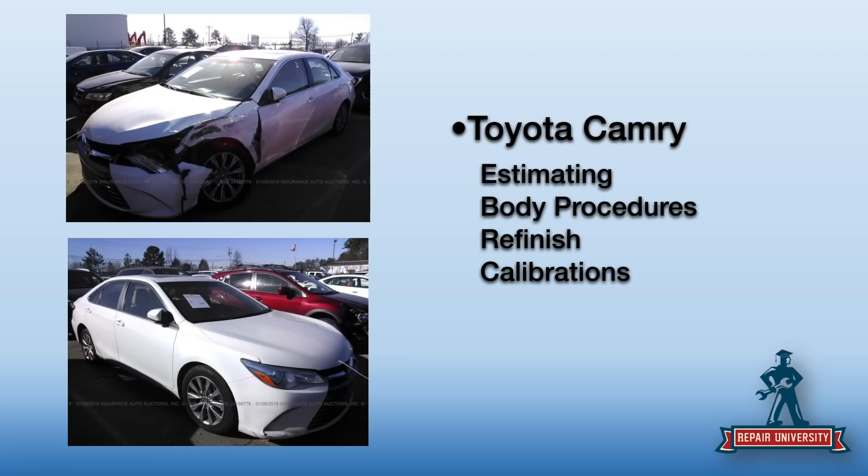So we're going to talk about the estimating. What we call the body procedures will be the body tech. Refinishing, yes, painters, you too need to be thinking about OEM information that's available to you. And then we'll talk about the calibrations department. I don't want to say scanning. No. Pre-scan, post-scan, I think that's way overused. And if you think just having a scan tool gets it done, it doesn't. It doesn't, and you're leaving a lot on the table. So we'll talk about the tools and equipment that are required beyond scanning. You have to have a scanner or a way to scan, but that's such a small piece of what we're actually going to talk about. A tiny piece. Very tiny.

And as we get more into this, it's honestly the scariest thing in the shop for me. I spend hours and I go, I don't have that tool. I don't have that tool either. Yep. So we've talked a lot lately about, is the dealer just my best option? And I think we'll spend a lot of time on that this year.

I think somebody said that before. I don't know. Some crazy guy from Brooklyn. Oh, some guy. Okay. Some guy. All right. Same lunatic talking about measuring cars.

So Mark, what do I need to know about this 2017 Toyota Camry? Everything. And when do I need to know it? Now. I need to know it right now.

So it's really about what's available out there to know everything now, and that happens in the beginning of the process, not when the car comes into the body department, not when we're trying to figure out how to get the frame rail section. We always hear that online, people asking, can somebody send me the sectioning procedure for the frame rail, with a picture of the rail already out of the car and the new rail sitting on the floor. It's too late, you removed it.

It's kind of like taking the heart out and going, anybody know heart surgery? I don't know anybody that has heart surgery. So the process for us begins before the car hits the blueprinting stall. As an estimator or blueprinter, before you walk out into the blueprinting stall, which means you should have a technician out there doing teardown or whatever, there's a lot of research that goes into preparing you to walk out to that stall.

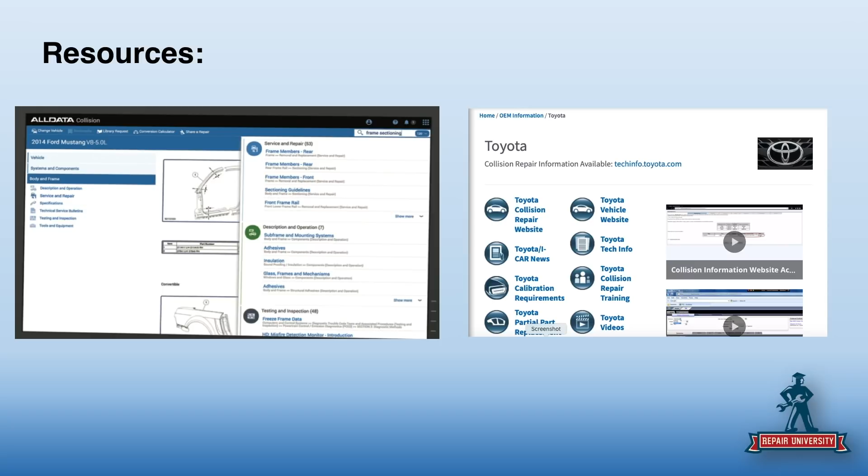Now I've got three potential sources of information. Those resources are a third-party information site. For us, we're looking at ALLDATA Collision Advantage. We also have I-CAR, which is available out there as a third-party site. You can use estimating systems too. Some of those have some information available.

Really what we're dealing with here is you've got to know what you're looking for, you've got to know to go look for it. Part of this is we've got to really look at the car. What options does it have? Where are we going to go? This is before you can ever use an ALLDATA or even the TIS.

So let's talk about TIS. For Toyota, that is TIS, and that is the website that you're going to go to.

Wait, what? Isn't Facebook one of the places to go, one of the three sites for information? Oh, I thought it was one of those free sites you can go to and ask information and find out. I wonder if there's a Surgeon Doctors Operation United page out there where I'm in the operating room, I have an appendix out and the liver out. Does the liver have to go back in? Does someone have that? Which procedure do I cut first? What was that movie with the liver and a fine Chianti or whatever? I don't know, thank God doctors don't operate that way. Oh, you're in court right now, it's like professional lawyers united. Well, here's the thing, you don't know because you can't get in. Right, I can't get in. Yeah, there might be, there might be. It's like my client's up on this right now.

All right, well we covered Toyota and we covered TIS earlier in the year. There's a couple different ways that you can access that website. You can do it on a 48-hour pass, you can do it monthly, you can do it yearly. Depends how many cars you get in your shop, you might want to buy yearly if you get a lot of them in there.

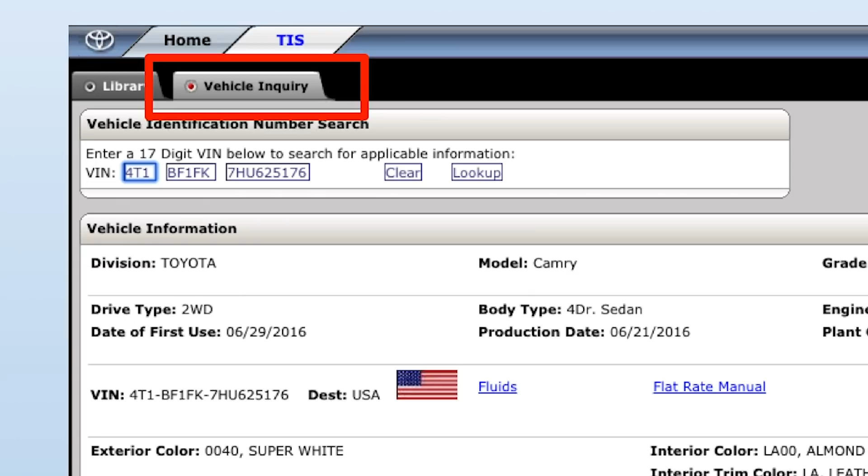So you see library and you see vehicle inquiry. The first thing we want to do is jump over to that vehicle inquiry tab. That's where we're going to enter our VIN. We hit lookup, and it's going to decode that VIN and tell us all kinds of useful information.

All the different options that the vehicle has, because if we don't know what options it has, we can't fix the car. One thing that's coming to light, and we'll talk a bit more about it when we get down into options, is that this isn't your golden ticket. As things become standardized on vehicles, whether that's ADAS or safety systems or whatever, doesn't necessarily mean they're going to be listed here.

Remember back in the old days, every time a car would come out with anti-lock brakes, they'd put an emblem on the back? Well, now since every car has it, they don't have that emblem anymore. It's the same kind of thing here. But trim packages—I order parts by trim packages and some other things.

So if we jump back and go to the library tab, you're going to spend 99% of your time on TIS inside this library tab. Then if you go to where you do your search—we've already defaulted to looking for a Toyota Camry 2017—you'll see across another set of filed tabs.

Just real quick, you have the summary tab, pretty self-explanatory. Technical service bulletins, recalls, TSBs from Mexico and Canada—you need to make sure you're paying attention to the country you're in at some point. You're going to see all kinds of things in there.

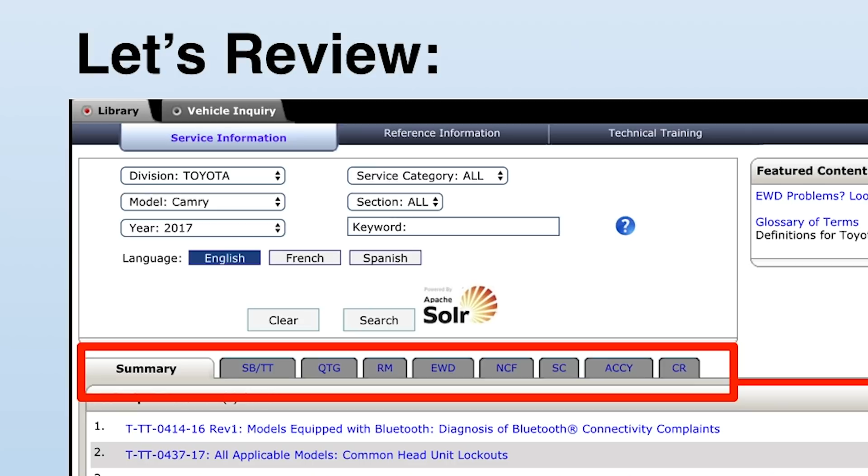As you go across, you see a few more tabs: SB/TT, that's service bulletins and tech tips. You have the QTG, which is quick training guides. RM is repair manual. Electrical wiring diagrams are EWD, new car features are NCF, service campaigns SC, accessory information is ACCY, and CR is the collision repair manual.

Now, most people are going to go right to the collision repair manual. And you're going to miss a whole lot if you do. Right, you've got to be in the repair manual too.

Here's the breakdown: if you want to know how to take something off, put something on, or disassemble it, take it apart, you're in the RM. If you want to know how to weld something, join something, bond something, paint something, seal something—more along the lines of the nuances of collision repair—you're in the collision repair manual.

So you can use search words, keywords, go to the summary tab, search and bounce between the two if you want to. But we're going to live and die inside the RM and the CR. There are a few occasions where you'll jump off to a few of the other tabs.

Keep in mind, when we did the Toyota show, we showed you a lot of online training that Toyota has available, free to anyone in the industry. You don't have to pay for TIS to get a lot of access to that. That is not what those quick training guides are.

On the top it says technical training. That tells you how to destroy their welds and how to practice your welds, and there's a ton of great stuff in there too. But we're not going there in this show.

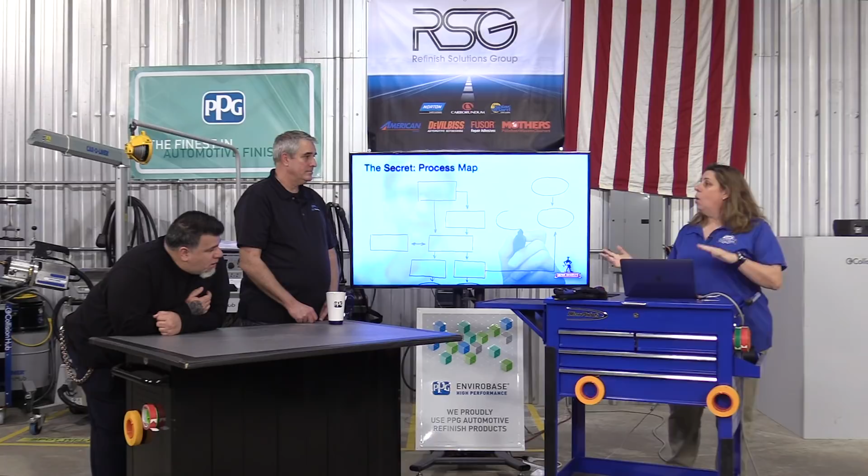I feel like what was that Oprah Winfrey book, The Secret, that she promoted or whatever? Here's the secret: with every repair, I build a process map in my mind, because I've gotten there. I wasn't always there - I used to have to kind of scratch it out. There used to be whiteboards all over the place. I build a process map for that repair.

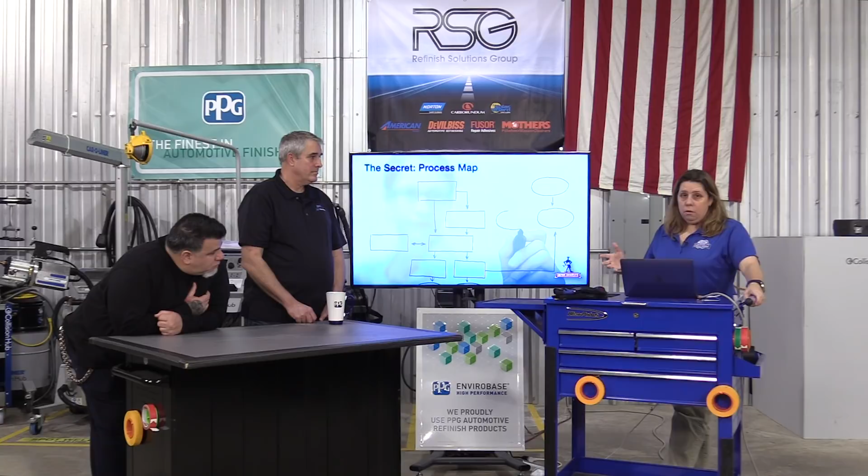Everything that I know I'm going to have to do - what's coming off the car, what's being replaced, what's going to go back on the car, what's not. And as I'm building that process map, that is telling me what I need to go research for. So if you think that OE repair information magically appears based on 'I'm going to replace a fender,' there's a whole lot of stuff that you're missing.

Well, think about it - if you're going to pull a dent on a car and you disconnect the battery, the estimating system is not going to serve you anything on that. And there's so much more that we're going to have to do, that you're going to go into. So as you build this process map in your mind of what's going to happen, that's now telling me what I need to go research for, and the answers that I need to find.

So some OEs have general position statements. Now those are more than just 'don't use aftermarket parts' or 'pre-scan or post-scan.' Some OEs have a lot of really detailed information in them - Toyota is one of them. Toyota has a lot of CRIBs, collision repair information bulletins. They are available out there. I will say Toyota's been moving them around on me lately.

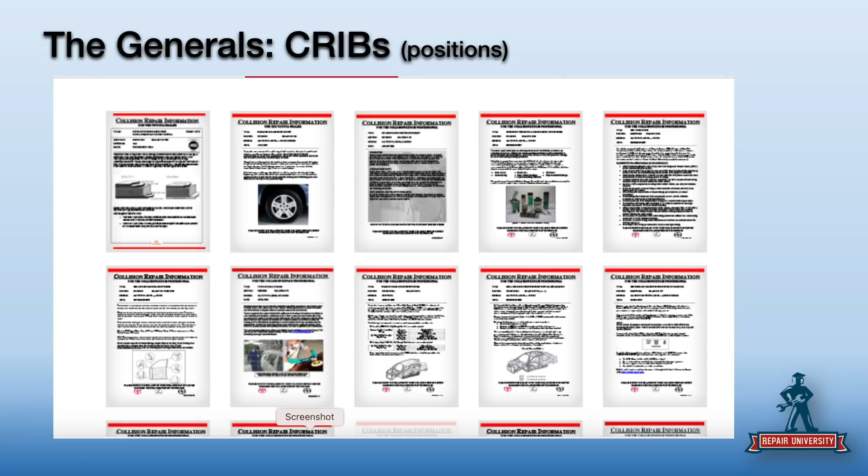So I feel like I'm playing the shell game at Vegas for $5 a try or a guess or whatever, but they have a bunch of CRIBs. Most shops who work on a decent amount of Toyotas have these kind of printed out and have them available. CRIBs for Toyota can cover everything from how to repair a dent, the primer that you have to have before you do filler, the welding precautions, paint, corrosion, glass protection, one-time use parts - all kinds of stuff.

They're more the company that understands what these CRIBs are actually for, or the position statements. They're really not standalone - they're in addition to the manual, and it covers a bunch of vehicles, not just one particular procedure or position to stand on. It's more of an addition, an amendment, or an addendum to the repair manual that's already pre-existing, to explain something - like, they changed the materials in the center section, so there's stuff that can't be repaired, but it covers all their vehicles from this year forward.

That's really what a position statement's for, or what a CRIB should be, as an addition. I don't have to change the whole manual, but you know what, let's mention this - it's a repair information bulletin. Yeah, that's all it really is, you know.

But now as I've started to build the process map in my mind, I've seen that car, either in the pictures that maybe my porter turned into me, and I know it's one of my blueprint requirements today - it's on my assignment list. As I'm building that process map in my mind of what I know is going to have to take place to fix this car, I now go for Toyota and I look at these CRIBs. I'm not by any means standing - they're not things I'm going to shove across the desk at an adjuster or whatever. But these CRIBs, the ones that are relevant, are starting to guide my conversations. They give you the cheat sheet.

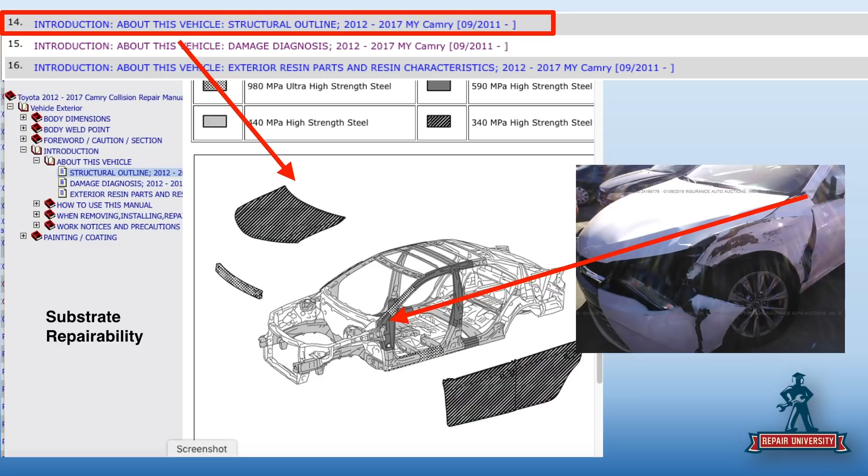And in the rest of the diagram as I go through substrates, that's really my only substrate concern right now - the rest is mild steel. I've got a little 440 on the rails, but 440 is repairable. We'll find out when we actually see what it's got. So we're good to go on that one.

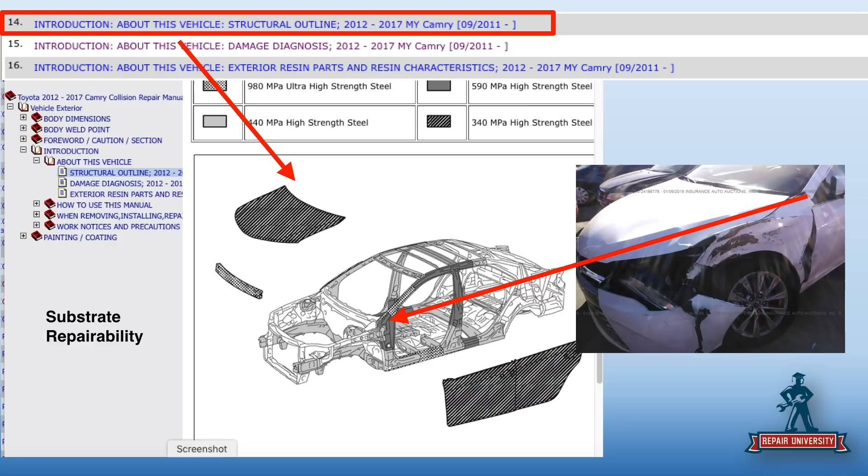But now I know I've got to pay a little more special attention to something. So let's talk direction of travel. Yep, this car took a glancing blow. Obviously, suspension's a mess on this one. Well, the applied impact forces are at or at a slight angle to the center line of the vehicle.

So you would anticipate this type of collision event might have laterally moved the car towards the right to a certain extent, which would make you think, okay, let me check underneath the hood visually, see what type of damage might have occurred that left some areas with stressing to the seams, seam sealer cracked, on the opposite side of the vehicle. We can see the rim was induced inward at the top because of the way the front of the nose was pushed over a little bit and kind of smushed inward.

So you're going to probably anticipate the strut towers moved. Strut tower, strut - you're going to anticipate the strut. You're going to anticipate, obviously, the wheel is damaged already.

But then, like we said, we're going to measure that A-pillar. So we have some things we're going to have to look at and measure diagnostically, because we might take the fender off, the hood off, maybe the wheel, the bumper cover, whatever's left of it, and the headlight, do some measurements, and find out the car is really a total loss because of the structural damage, the prices of the parts, and the amount of work that has to be done to the vehicle.

Or we might find out, shockingly enough, maybe that wheel's all completely collapsed because the strut gave way, and actually the strut tower's in the right spot. But unless you measure it, you don't know.

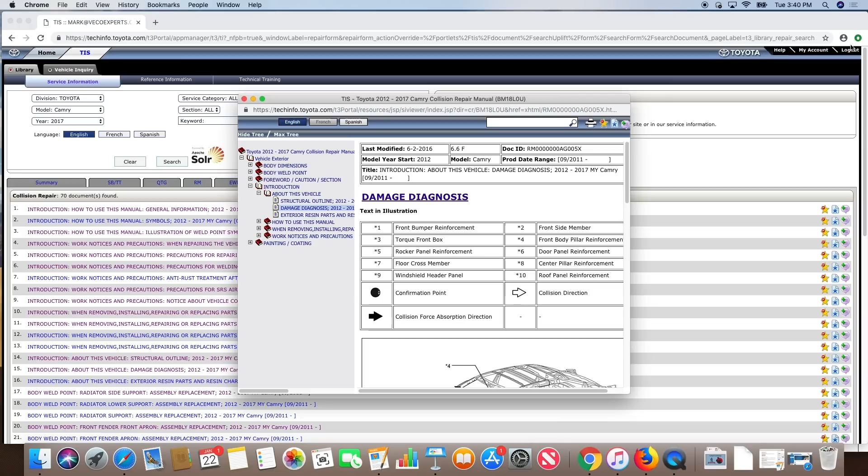If you look at 14 above it, that was where we were when we were looking at substrates and kind of what this vehicle is made of. But if I get into that page, Toyota has all kinds of diagrams for me that explain how this car is going to absorb energy and how it transfers, where's it going to go, and things I need to be aware of.

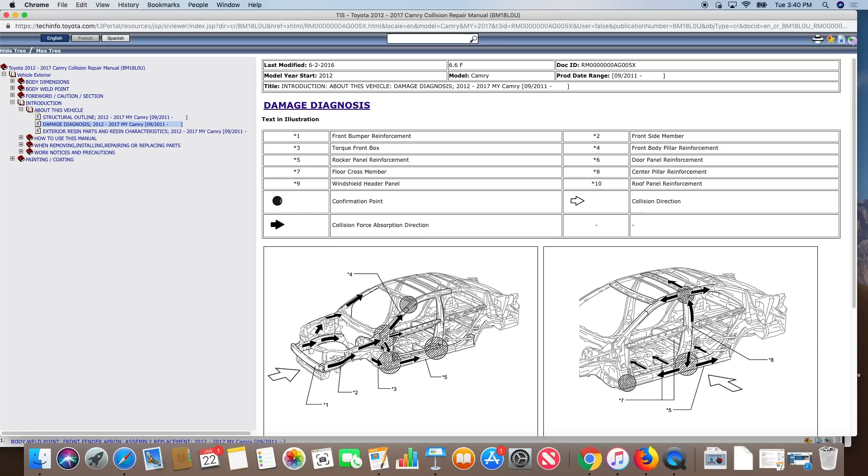So to keep in mind as an estimator, when you're looking at collision force absorption, basically if the car's hit this way, this is how energy transfers. If the car's hit this way, look at that, it's going straight across. I love this. So I take a side hit and it's going this way. Right? So up here it goes that way.

Well, that's the importance of the rocker, the inner rocker and the floor rocker cross panel members. It's just mild steel rocker panel, well the outer panel is. The inner rocker is different. And the B pillar is meant to transfer the energy up and over the roof to the opposite side.

But here's the problem you have with this particular vehicle. The applied impact forces that we have on the vehicle are from the front going rearward at or near a slight angle to the center line of the vehicle. And they don't give us a depiction of that because why? Well, it's not normal. Vehicles are built to absorb a certain amount of collision energy and transfer it someplace else, almost like tag, you're it.

And the idea of this is to keep the occupant safe. It's almost like the quarterback, and the front rails and the rear rails of the car are your offensive linemen that are trying to protect the quarterback from getting the Lawrence Taylor sack. And in this particular case, we have an opposite thing, it's like a Super Bowl episode.

Well, in this case, you can almost think of it this way: there was a handoff made, and now the nose of the car's running away, but the linebacker caught up and kind of tapped it, knocked it over. But here's what I need to know about these diagrams.

So even when I have an impact that is not exactly a replication of what just happened to this car, Toyota is telling me where the critical points of mass are. Those big circles are Toyota telling me that this is a major junction in the car, so it's what they call a confirmation point. These are the don't-touch zones, don't screw up zones, don't mess with these zones.

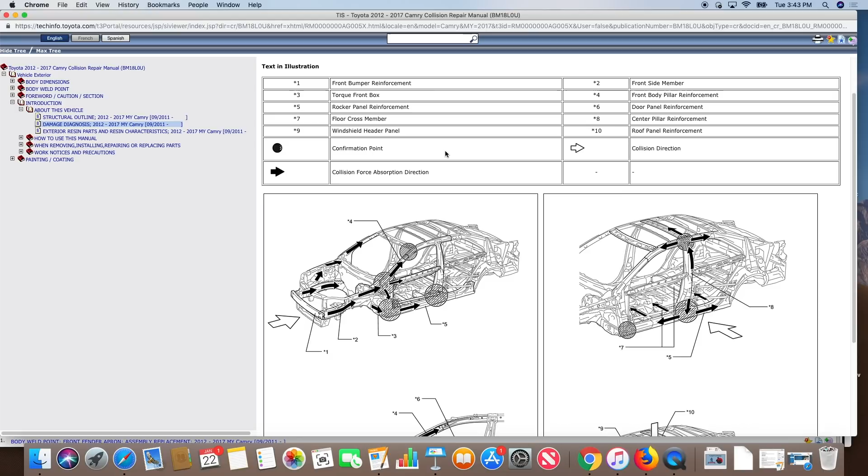For example, at number 4, on this picture over here, the top circle, which would be the A-pillar area, if you had applied impact forces going rearward from the front to the rear, at or near parallel to the vehicle center line, that area there, and you guys have probably seen this before, the upper rail on most of the Toyotas overlaps the A-pillar, and it's got the 3 or 4 fillet lap welds. You'd see that kind of crush a little bit.

In this case, the opposite. The direction of force is the opposite way. What you might see in this case is that overlap rail there might start stretched, pulling apart from that area. This is the difference, because it's not a depicted type of hit that we see here. When you get that fender off, you might even see this separated, versus beforehand, you might have not noticed it. It needs to be measured. Because the application of force is going rearward, it would be a crush. We don't have a crush in this. We have a pull. Almost like you're trying to rip the car apart from itself, because it got hit from the rear going forward and kind of slapped it over.

So you might see more visual stuff in this case versus a normal traditional collision event where the energy would be forced rearward. And that's the importance of getting some stuff apart and knowing, like Kristen said, that's a key point right there. That confirmation point is very important to look at, because you do have an overlapping of different materials there.

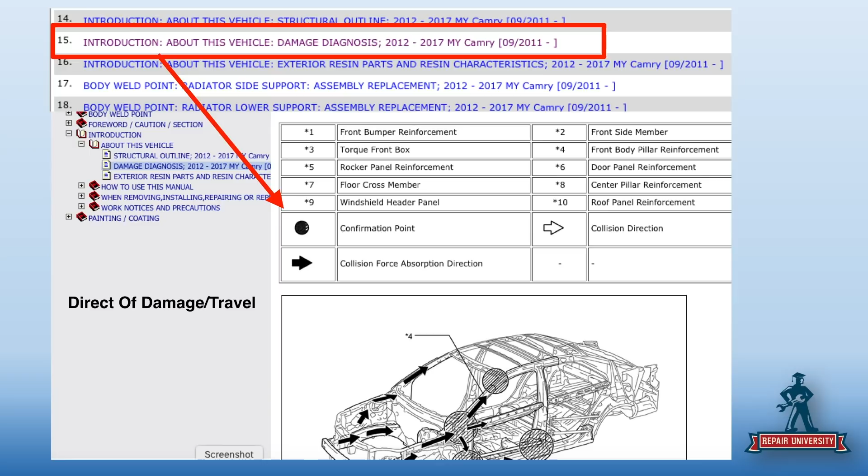Yeah, and if it gets hit in the front, that can possibly pull, as we're talking about, that forward, but it also could pull this down. It could pull that down. That's why we've got to measure it. It could also take the upper hinge, and you're kind of twisting it forward, because I took the rail and dragged it over. If I drag it over, everything's welded. What am I going to do with this upper portion? I'm going to drag that forward, the door.

And we don't have a good picture of it there, but there could be a good gap between the front and rear doors now. And you go to open it, it's kind of springing upward, because I took that and kind of tilted it forward. I may not notice that. Oh, it's the hinge is bent. Or the door's twisted on the frame.

So if we just look at that car, we go, the nose is just swung over. I think this is a car that everybody would have walked up to and put a little setup and measure time on, because that nose is swung over. But it's a much greater, bigger picture. And I know it's a bigger picture because I have the OEM information to explain it. Because we know what it's made out of, and we know the load path travel. Exactly. So we've got to now start to look at it from that perspective.

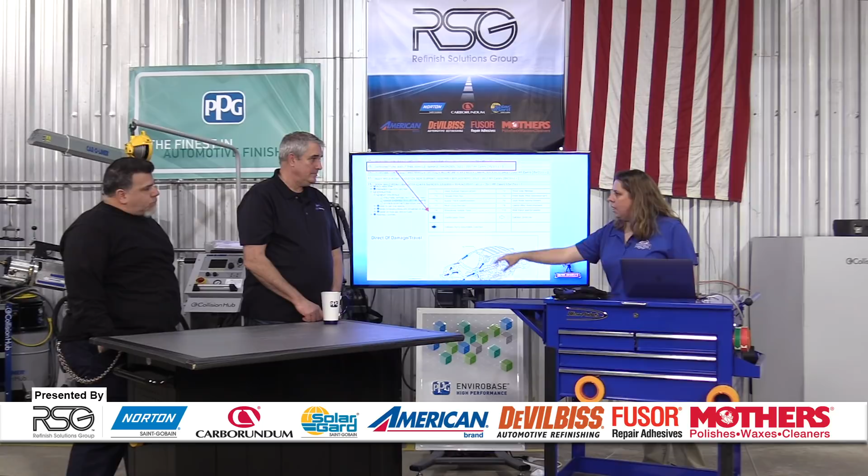Right. So if you're writing the estimate with these, this is 12 hours of setup and measure. Because I've got to measure the front, I've got to measure the upper and the lower, and I now have to measure the side, and I'm putting all of these setups and measurements on my estimate. And I may have a third party looking at me going, "Are you nuts?" Crazy, yeah. Okay, great. Here, let me take you to the information. Let me show you how the vehicle's built and designed. These are the no zones, and I know I potentially have something in the no zone, and if that no zone's wrong, that's live or die.

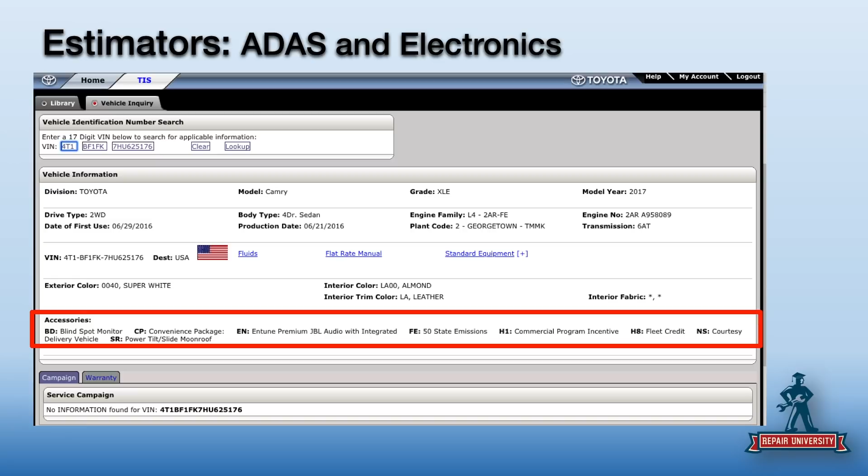So let's talk about ADAS and electronics. So we're going to go back to that screen where we were before, vehicle inquiry. Right. Now, ADAS is a lot more than just, when we say ADAS, or however you want to say it, it's become a buzzword, right? It's the latest, hottest thing in the industry.

CIC a couple of weeks ago, that was all that was on the agenda, and I was like, hey, we can't even weld. Can we talk about that? No, of course not.

But it's the hottest thing in the industry. And because people are talking a lot about scanning, we say ADAS, ADAS, and scanning, and we feel really good about ourselves, and we feel really intelligent and think we've advanced the industry a lot. There's a lot more electronics in the car. We almost get rid of ADAS and just say electronics. Yep. So there's a lot there.

So for instance, this is just a heads up. It's kind of a diagram. We've all seen the diagram that shows all the cameras and monitors and all this. These are some of the other things: rain sensors, trunk safety opening sensors, seat detection occupancy sensors, the ambient light sensors, door position sensors. Those are some of my favorite, right?

I like the gesture recognition, because is that a different one for Brooklyn? How does gesture recognition work? You would have to do something like this. I mean, when BMW sets gesture recognition in my car here in Arkansas, is it a different process than gesture recognition in Brooklyn? Yes, kind of. From what I understand, you guys usually will say "bless your heart." In New York, we start with an F and end with a U, and you figure out the letters in between. We'll play like Scrabble now.

Right. There's headlamp leveling systems. We have all of these electronics that are driving us around the car. So if we go into TIS now, we're going to go back to that screen that we were on earlier. So we're back into TIS. We're on the library tab up here. We're going to go over to the vehicle inquiry tab. There's our VIN. There's where we looked it up earlier.

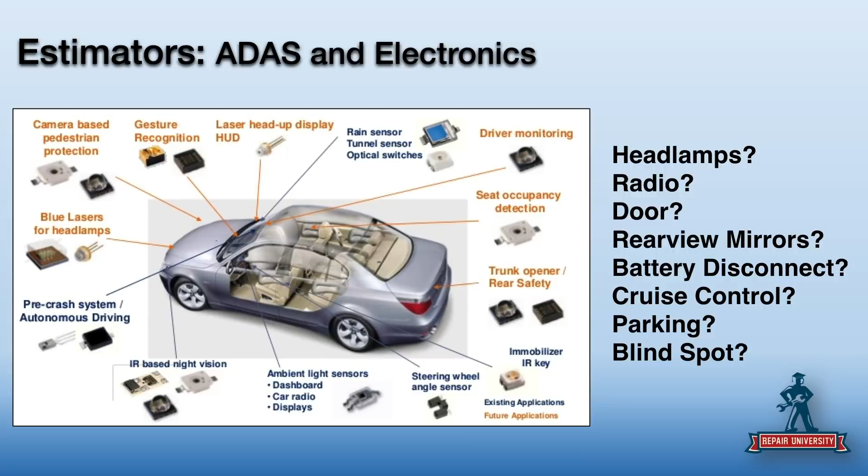I remember it's a Camry. This one isn't, but it could be a hybrid. And then we've got another whole bunch of resets and disconnects to do, especially for precautionary reasons, not to injure yourself. Right. I've got potential cruise control modules and sensors on the front of this car, parking assist sensors. We know that we have rear cross traffic. Distance control, a crash avoidance type system that's either in the glass or in the grille. That's going to have to be realigned. There's a lot of stuff, and we know this car is equipped with blind spot. Right.

It's under the quarter, under the bumper cover on this car. But I'm going to be detrimming that car and painting it back because I know I'm putting a front door on it. So as I think about that, what is going to be involved there now?

With all of these systems, there's a couple different things. There's a difference between the ones I'm going to be taking off the car that are within my bumper, my core support, etc., and the ones that are just going to be detached from the computer for a while because I'm cutting the battery. That's going to drive my research on what it takes to turn these back on.

As an estimator, it's twofold. One, I need to make sure I'm getting paid properly. It's more than just plugging it in, no matter who I'm using for my scan services, and walking away from the car. There's still a lot of work that's going to have to be done, especially when we get to headlights later when we talk about what has to be done. There's a lot of work that has to be done that needs to be accounted for, and the shop needs to be compensated, and or the technician needs to be compensated for that.

That's part of the reason why it's so important to do a pre-repair scan of the vehicle. Find out what codes you do have. Now, obviously, we're going to anticipate probably something with the suspension, ABS, and probably a flat tire. We're going to anticipate something with the headlights. That's what I really anticipate right now, right off the bat, should be there. What else might be there if the car was running, not running, or whatever the case is? I don't know. But now I know that these 7 codes were present prior to the repairs.

After the repairs are done, I'm anticipating those 7 plus a bunch more because I probably had stuff unhooked, plugged the battery in, tightened it up, moved the car to a different position, unplugged it again numerous times while stuff was disconnected. But even with or without a code, throw a code, doesn't matter. I still got a calibration process for that because it was part of the repair.

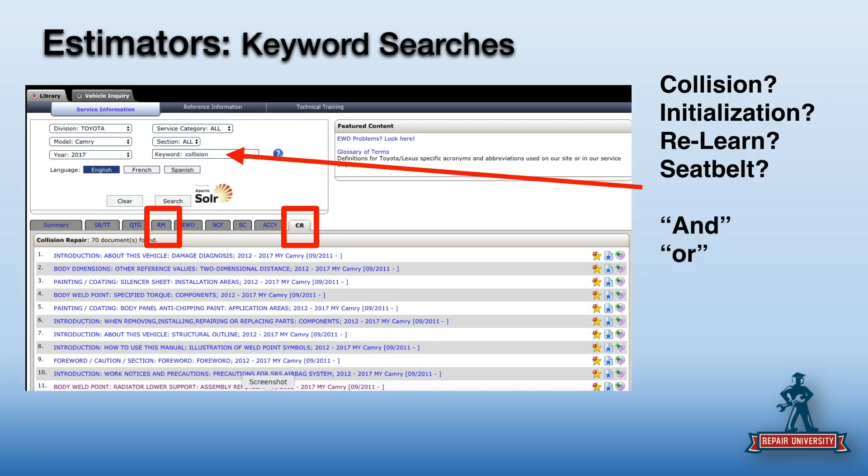Yeah, that's a great feature when you're just learning. I will say after a while, when you know those things, it's going to be a relearn process. I know it's going to be in the RM, I know it's not in the CR portion. Right, I want to filter out the noise.

Well, once again, the more you do it, the more you become acclimated to it, the more used to it you get. Especially with Toyota, the way they have it set up, all the different models across their range will be in the same section, same area. So you'll start getting used to what keywords to use and how to get there. Just practice. The truth is, the learning curve on TIS, if you get in there, start clicking around, take what you've learned here today and jump in for an hour or two, you'll be pretty familiar with it.

You'll be good. So there's nobody that can do a show, even if we did a 5-part series, that could tell you everything you needed to know about Toyota. We still to this day, as we're doing a show, go, hey, have you seen this one? Yeah, exactly, we still find stuff that we need.

The thing is, you're not going to the system hoping that it tells you what you need to know. You're going to the system knowing what you need to know, and specifically and with intent looking to find it. Eventually you'll get to the point where you know where those things are, or you'll find them through using your keyword search. But I don't just open up TIS and go, okay Magic 8 Ball, show me what I need to know about fixing this Camry. I've built that process map, I have a plan, it's all laid out.

I know what parts and things I have and what I don't have, and what to click into - Mitchell, Audatex, or CCC. I don't have to click into any of the estimating systems right now because I'm using the OE to tell me the other things that I need to know. So now I'm going and getting the information that I know I need. I'm not going to TIS and asking it to tell me what I need to know.

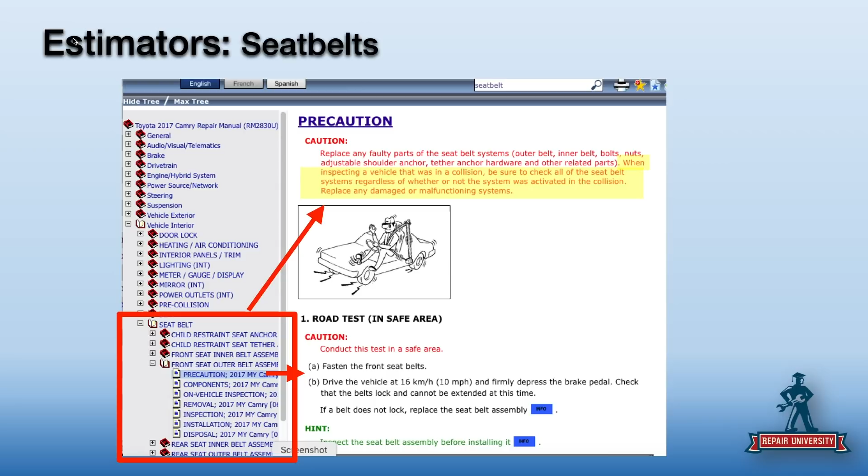If the belt does not lock, follow this assembly here. So if we click the blue, there's a whole other procedure, and this is kind of our flow chart. Then it tells me, when I go a little deeper, that for inspecting the front seatbelt outer assembly for a vehicle involved in a collision, there it is in another document.

So it says on vehicle inspection, perform a system diagnostic check. What is that? Well, it could be electronic and/or driving - that's a scan, right? Yeah. So if I didn't have the Toyota position statement that says you've got to scan, I now know that Toyota says if a vehicle is involved in a collision, I've got to check the seatbelt. Got to scan. And to check the seatbelts now, I've got to do a scan.

So now I've just - I don't need a position statement. I don't need that position statement at all. Well, let me ask you a question.

If I'm going to drive the car in the parking lot and I have room, I'm driving at 10 miles per hour and jam on the brakes to make sure it locks up - when I go to test the passenger seat, how do I drive the car from the passenger seat? Oh, I got technician times two. Okay, yeah. And then how do I do the back seats?

But it does bring up a good point - if you are going to be doing a road test of a customer's car for repair, which pretty much I can't think of a single repair scenario now that doesn't have a road test, please make sure you have the road test waiver signed by the customer. They need to understand you're going to be out driving their car. And don't do this on public roads - don't just stop in the middle of traffic, right? Yeah, you don't want to do that.

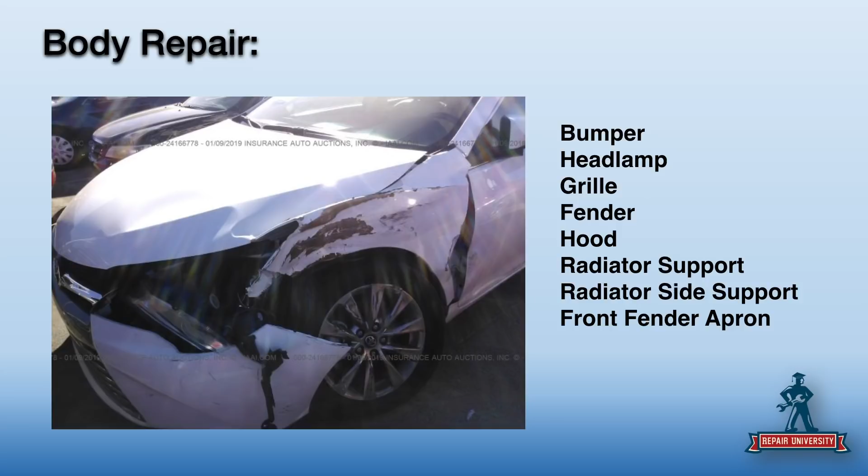So it's great if you've had that stuff attached, but what if the estimator missed something or didn't think about what you're thinking about as the tech, since you're thinking at a different level? We hope you have a summary meeting where the estimator, technician and painter all get together before this car leaves blueprint, but maybe you didn't. We're going to talk later about equipment you may need, which we'd want to find out before we ever get the car in the shop, because if we don't have the equipment, we may not fix the car.

So now I'm going to go in as the technician and start looking at my procedures to repair this car. Let's start with something as simple as the headlight. The question I need to ask myself is, where is it? Not where is the headlight on the car, but where is the procedure for this inside the manual? For Toyota, it's not in the body repair section. I've got to go over into the repair manual section to find the headlight. Remember, RM is when I want to take something off the car, disassemble it, repair it, and put it back on. That's in that section over there.

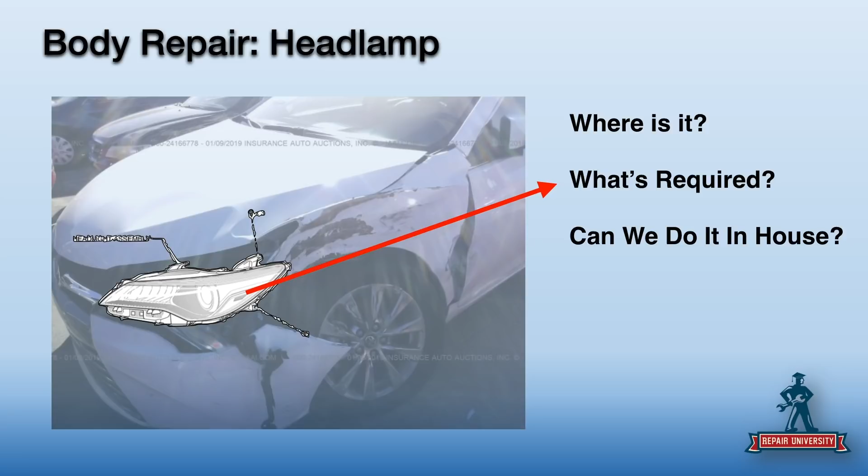What's required for that headlight? We should go on the internet and find out. Well, I'm just going to go over to Facebook and ask a quick question. Exactly. Hey, how do you get this door handle out? Oh my God, Lord Jesus.

Okay, you can get the door handle out. What else are we worried about? The headlight—can we do this in-house? Every time I start talking about headlights, technicians look at me like, it's just a headlight. You're not a real technician, are you? You're one of those people with book smarts that doesn't know how to do it. It's just a headlight. What do we need to know about a headlight? There's three 10-millimeter bolts. Okay, let's talk about what we actually need to know about a headlight.

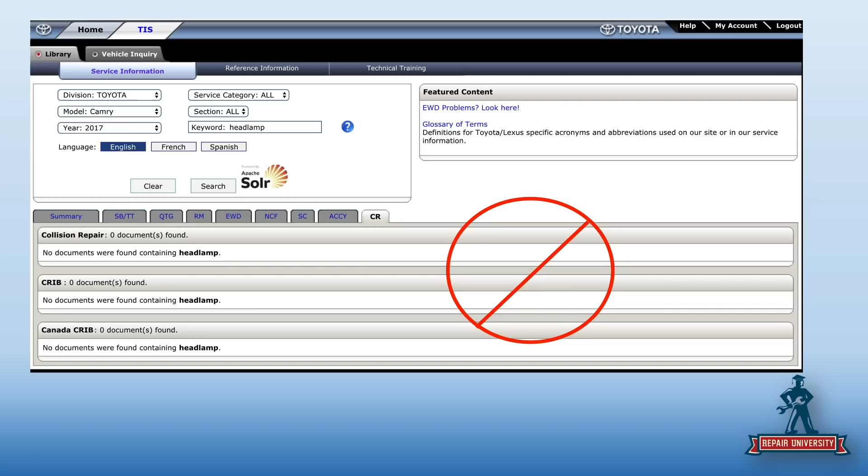Okay, so if we go into TIS and we're searching out a headlight, there's nothing in the collision repair section. So if I type headlamp, headlight, lamp, whatever into collision repair, I get zilch, zero, nada—there was no data, which is why I went on Facebook and asked the question. Now I go over to the repair manual and, oh look, exterior lighting systems. There we go, there's only one choice. It's right there for me, everything I need to know about lighting.

So again, I get worried about this a lot—when you put procedures inside estimating systems, is it going to be intuitive? Sometimes they call it the repair manual here. Do I need to jump to the service manual instead of the collision repair manual?

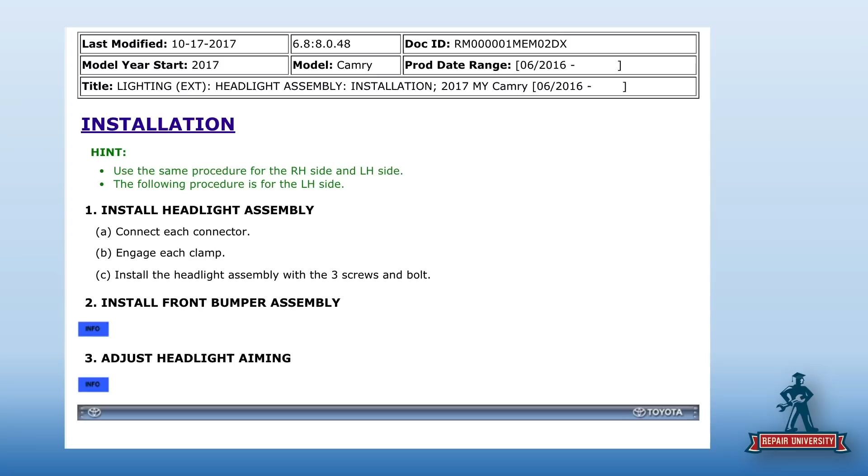So when I get into it—lighting, headlight assembly, installation—they do have a procedure for how I'm going to remove this, and then how I'm going to install it. When I go to install the headlight, it tells me I've got to put the front bumper on as well. But then it tells me to adjust headlight aiming. That's no big deal, right? Just grab a piece of tape. It's not just two mounting tabs. So now I go, well, what does that mean? I get into my next document under headlight assembly and adjustment—what is adjustment? What all is involved when I'm adjusting a headlight?

All right, so we're going to jump into TIS real quick and get into this headlight document. Here I am—we've now decided what it's going to take to install it. I have the bumper, obviously, but then I have this adjust headlight aiming, and I click that blue tab, and it takes me in here—wow, here we go. So just a couple of things off the bat.

We're going to make sure there's no deformation, but we've already done that since I fixed the car. I need to fill the fuel tank—I need a full tank of gas. What do you put in the full tank? Apparently water—well, it just says fill the fuel tank. It doesn't tell you with gasoline or oil. You have to read it.

It says unleaded fuel only. Oh, okay. Now, is that high test or regular test? So I want to go back to my estimator. If my estimator knew this and the car comes in and it's running on fumes, which I get so many cars in the body shop running on fumes, I may have to add a $50 fuel charge to the estimate. Right. Or when we're in the conversation with the customer, if they were dropping it off, we would say, when we do this, make sure you bring the car in with a full tank of gas. That would be great to tell the customer up front, wouldn't it?

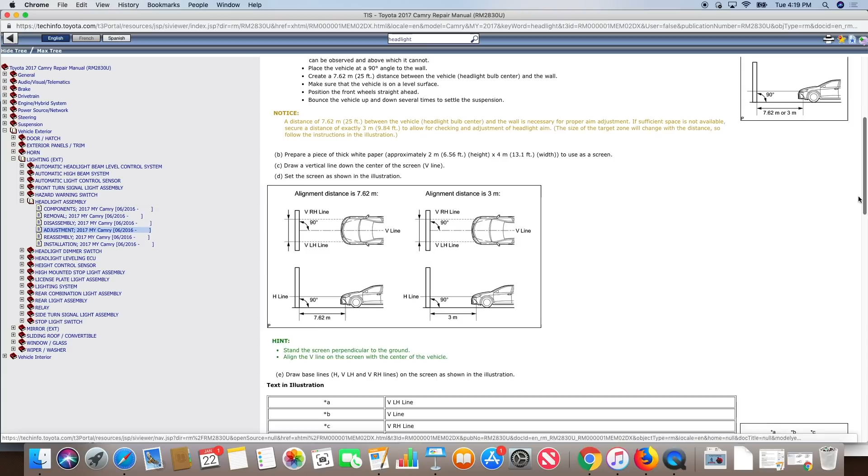Okay, now we're ready to aim the headlights. So I've got to prepare for the aiming. There's a minimum distance. There's height angles that have to be here. As we scroll down, there's more on the angles that I'm looking for. Lumens, the V-lines. This is a pretty intensive headlight aiming, adjusting, and checklist.

Well, this must be an exotic car. Oh, it's a Toyota Camry. It's a Camry. Okay. Told you we should have went with the Bentley. Just saying. Maybe Larry was right this time. It's kind of like the one time we thought, we'll just do a cruise. And then we were like, oh. I also voted for a Bentley on that one. Right, and that one came back on it.

But there's a lot in there to adjusting that headlight. So if I'm going to do that, at 0.4, is 0.4 enough? No. Well, and then this is a shout out to the tools to do it. Well, this is the database conversation with the database providers. You click aim lamps and it says 0.4, but then you go to the P pages and it doesn't even give a description of what that 0.4 includes. Right. Does it include the air pressure and checking the oil and the gas tank and the other person in the car, or is that stuff not included?

Right. Well, I'm doing the Vulcan mind meld with Danny. No, it's not. And keep in mind, estimating systems are just a guide, right? Of course. So they're just a tool, and then it's still up to you as the estimator in the shop. My feeling is lately on a lot of the estimates, I don't even put down aim headlamps or aim fog lamps anymore. I have dealer service. That's a set code in my system. And I'll usually, funny enough, put that in the wheel alignment section or the wheel section or the suspension section.

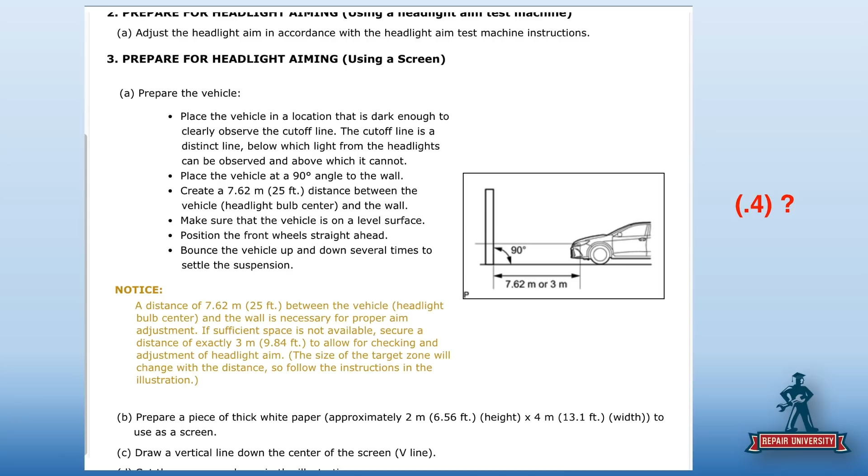And so here you're going down here besides, I got to have a piece of paper. It's got to be this size. I got to draw a line down the middle of it. This isn't using my garage door anymore. There's some processes and some things that have to go on. So some things to keep in mind. Now, as a technician, I'm going to keep drilling through every part I'm putting on this car with this exact same mentality. Where is it? What does it take? What is required? Can we do it? Those are the things I'm going to ask myself over and over and over.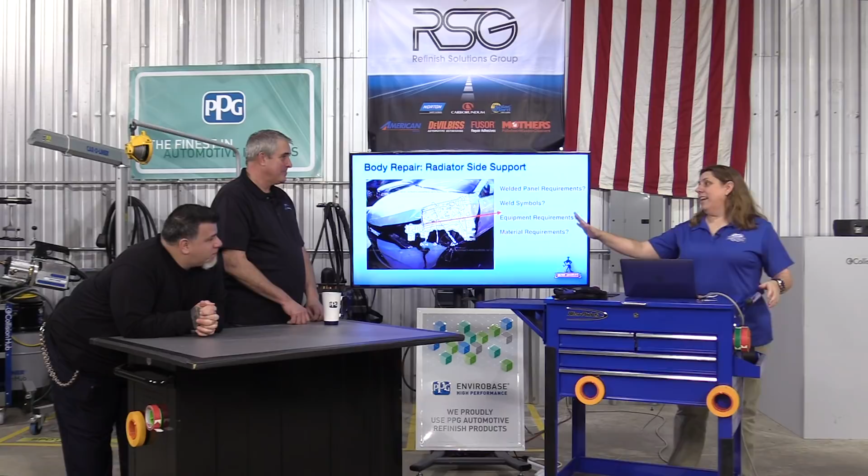So now let's get into sheet metal, right? Yep. So we're going to go for this, the radiator side support. That thing's smashed in. That doesn't look like it's going to fit properly. Well, I'm going to make it fit. Oh, okay. Because I'm a technician. How long have you been doing this for? 35 years. Not 30 like some of these people. You're a senior. Now, I got to go online to Collision Repair Technicians United and ask what's the procedure for this? Well, I'm kind of wondering about my triangles there at the bottom, so I may have to ask somebody on Collision Protection to explain that to me.

But so that's the diagram for our radiator side support. You can see where that panel is up there, where it connects to the front of the upper radiator support. It's toast, right? No, it's a welded-in panel, and we knew that going in. But now I'm thinking, what are my weld panel requirements? So from Toyota, what do they say I have to do? I need to go find the answers to that question. I'm building my own process map, just like my estimator did. What are the weld symbols? What do they mean? How do they apply to me?

Am I MIGging? Am I squeeze type resistance spot welding? Am I MIG brazing? Am I doing a lap fillet weld? Am I doing a butt joint? Am I doing plug welds? Am I doing just resistance welds? But even more than that, I'm still looking at this because now I'd have removal procedures as well. And I have symbology around removal procedures. How do I have to take this panel out?

Maybe that's different than how you're going to put it back in. Well, sometimes you have to remove a panel to get access to an inner panel to remove it, and the part has to go back in that same type of fashion the opposite way. Another thing we're going to look at too: we're getting surprised now by a lot of manufacturers adding adhesives in certain areas, or reinstalling parts that are not typically the way we would expect from the factory. We might even have some rivets. Not in this case, but in some, like the Chevy Cruze, we had that issue with rivets all of a sudden. But until we look it up, we don't know.

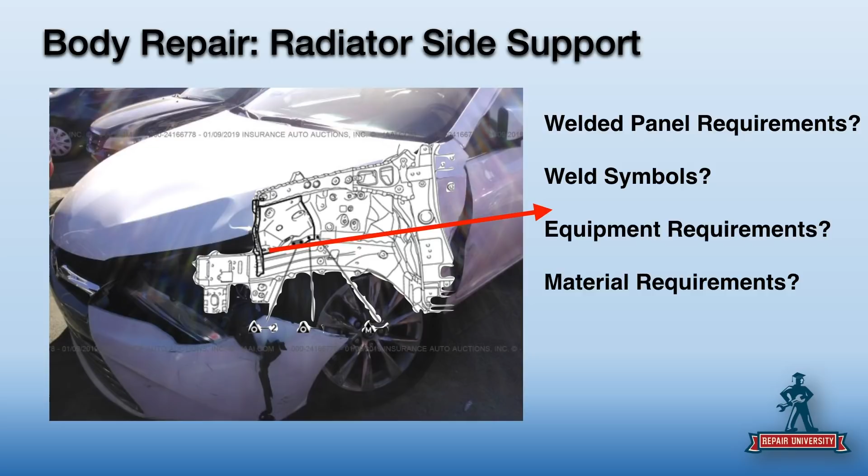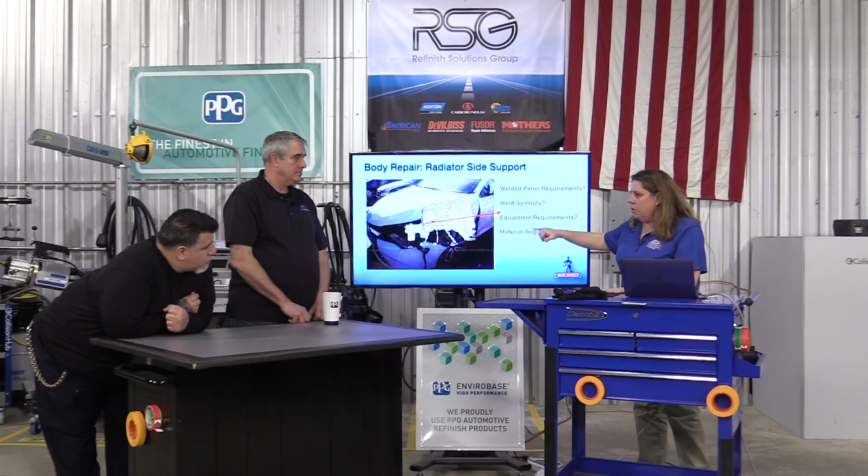Now, Toyota has some cribs for some of this, but it's also all in the repair manual as well. So my technicians may need to refer to cribs just as well as my estimators. But now I know, all right, I'm going to go pull the procedure. Now, just having the procedure, this is the one thing I explain over and over to the OEs. Procedures are great, and I don't care how great you make the diagrams or how cute and funny and interactive they are. There still has to be someone who takes that procedure, answers these questions, digests it, and now they have a repair plan for the car.

So Toyota, for instance, on spot welds says that they want 1.3 times more than what you take out. But I got to do math now? Right, you got to do math. So if you took out 10 welds, what would you put back in? 13 or 14? It's actually, you'd have to take the 3 and then round it up to the higher number. That's Toyota. Carry the one. So not every OE will, you know, some of the OEs basically say you're going to cut out 22, you're going to replace back 27. Some OEs may just have a math thing, and you got to go, oh, I got to figure this out, right? So you got a lot to do.

So now I'm going to go in and do some research. I'm back into TIS as the technician. Having just the procedure, printing off just that radiator side support panel isn't enough. I now got to have 3 or 4 more sets of documents to make all of this come together.

Ooh, but we have a check. We have a check for what? How many lines have we written on the estimate so far? Not yet. We're still at zero. All right. We'll get there. I was so hoping for it.

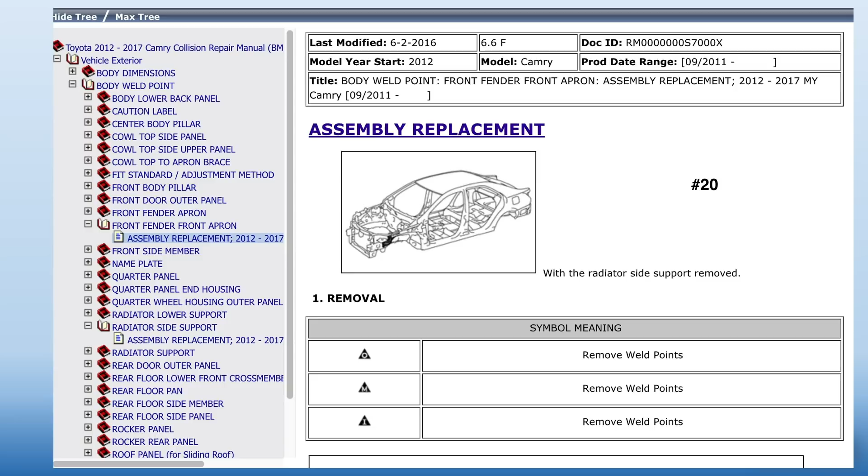Okay. So now I'm going to go into my welding notifications. So I'm going to get a few things here. One, here's my body repair procedure. I'm going to go ahead and pull that. I'm going to have that referenced over here because it's telling me what my removal locations are. It's telling me what my replacement locations are. OMI is outer, middle, and inner. That's a standard across Toyota. Just so you know, if you're working on Toyotas, you'll see them all the time the same way.

Once you start learning them, you know, I've done enough Toyotas, I don't need to look at the legend so much anymore. I refer to it quickly, but I don't have to study it, and I don't have to keep looking back all the time, because now I know outer, middle, inner. The terminology, yeah. It becomes second nature, because they keep it simple. They do try and help you remember these things.

And look, I mean, they have it on here from 2012 to 2017. Jumping ahead of yourself, Larry.

Hold on, okay. So I've pulled the assembly, right. I've got the assembly procedures, I'm going to go down them. Here's my removal process, here's my installation process, and here are my symbols for that.

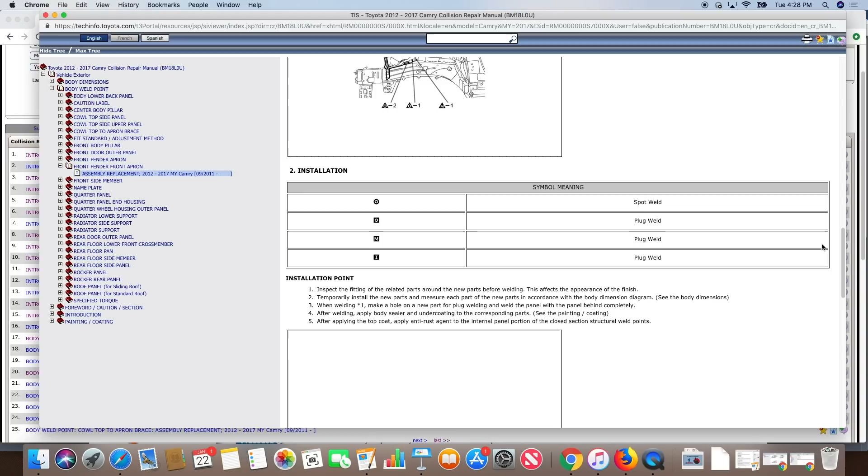I'm going to be spot welding and plug welding on this. Two welders tells me what? Two weld tests, two minimum weld tests, two setups. It depends on all the panel thicknesses and how many panels, and the type of welds. Here's my installation, here's what I need to know, here's the rest of my procedures.

Just go back up for a second there. Like on this one over here where they're showing you they have a circle with an O in it, and then two squares with circles in it. Next to them there's numbers, an 8, a 2, and a 4. That's how many welds you're going to have in that area with those.

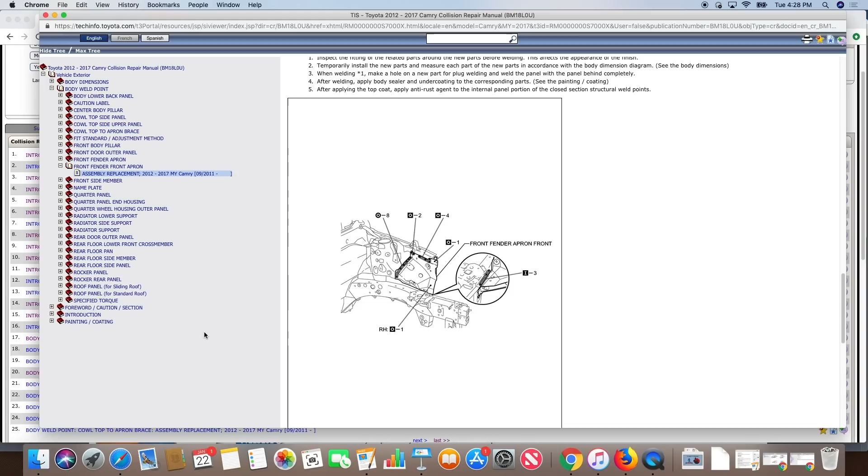And I'll be honest, the pictures are relatively close to how you're going to be doing the repair. So they are pretty good with their drawings to show you what kind of welds you're going to have and where they are and how many you're going to have.

So now I've got my replacement procedure. I have that, I've reviewed it. It's in this hand, so I'm not done. I'm not even close to being done. So now I'm going to go back into...

We don't know what those symbols mean. We don't want to ever take anything for granted and think that we've got it down or that we understand everything. So I'm going to go back into another document within TIS.

And these are my weld requirements, right? So it's telling me what the different symbols mean. It's telling me what Larry was talking about: inner, middle, outer, what plug welding, what MIG welding looks like, what spot welding looks like. Every triangle is removal, and it could be an outer portion of the material, like they're showing you with the drill bit, a middle where you're removing two layers, or an inner, which means you're drilling through all three layers.

Just drill straight through, don't even worry about doing damage to it. Which in this case, if you had a triangle with an I, you're probably going to use a drill bit. If you have an O and an M in a triangle, you may want to use a drill bit, but you might want to use your belt sander to cut through it. Belt sander would not be recommended for going through all three pieces. But one you might. One or two you might, yeah. Especially with one, you definitely want to.

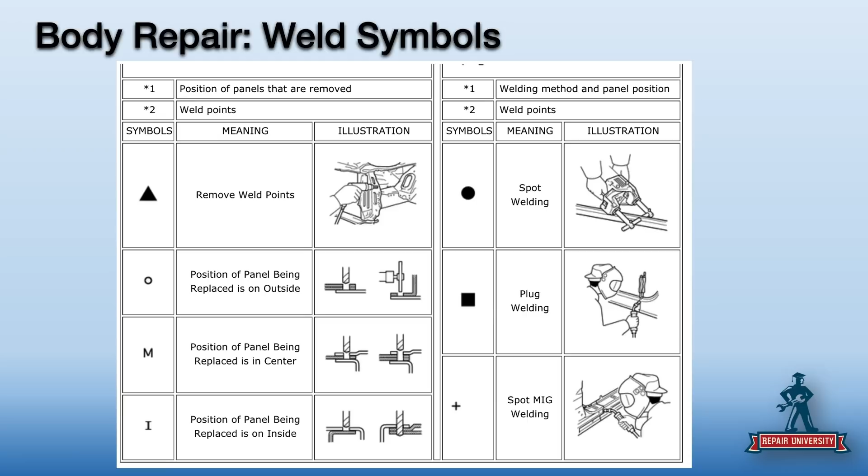Now you also take a look at your weld symbols, and this is every Toyota. A round circle is going to be a spot weld, and a square is going to be a plug weld. With an O, it's an outer. With the circle, it's a spot weld on the outer side, or you're going through the middle or through the inner. So they keep the same pattern through each vehicle. Makes life a lot simpler once you learn this chart.

I'm taking that chart, applying it back to my procedure that I've just pulled, and working on finalizing my plan. Now I've got to go do a little bit more. So when I go into work precautions and notices, Toyota's got a lot of great documents in there. We're back to welding. It breaks down for me what I'm going to do when I have 2 panels, what I'm going to do when I have 3 panels, what I'm going to do when I have 4 panels. So I've got to go all the way through this. It tells me what gas I'm using, what the mixture of that gas is supposed to be.

But if we look at spot weld, you know, what welder should I have if I'm going to work on Toyotas? Well, Toyota doesn't necessarily say it has to be a specific brand, so it's not like an Audi spec or whatever. Here's your specs: my welder must be able to have this pressure, must have this current, and I need to be able to adjust the cycle time to 0.23 seconds. Pretty simple, we either have it or we don't. If we don't have it, we don't fix the car.

But you got to remember, this is important. Your welding wire is AWS ER 70S-3, which is 70,000 tensile strength, solid core wire, versus what most shops have, which is a -6, or a -7 in some rare cases. So you may not have the right wire in your shop. You're going to have to take a look and make sure you have the right wire.

What's also nice, and I've talked about this before, here's a picture of it: number 2 is pointing at the cross section of what kind of panels are there. This gives you a good view in other areas when they show you cross sections. If I have outer panel damage and it's severe enough, I have to say the reinforcement's damaged too, because look at how close it is right up against it.

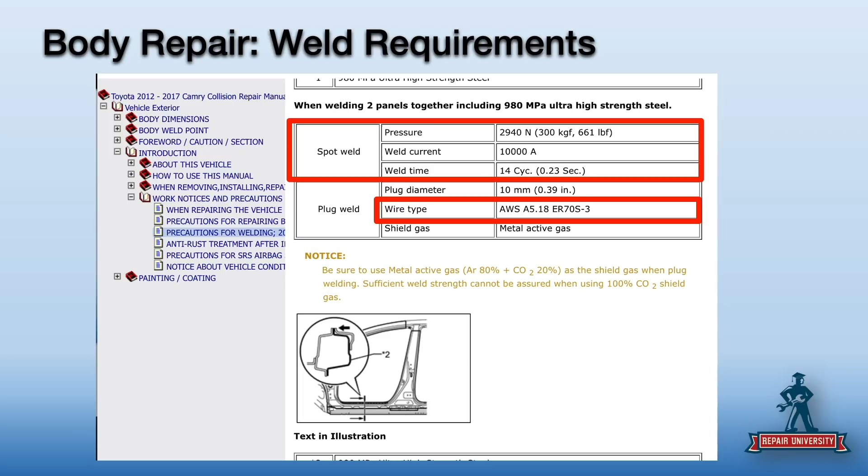Now, an important notice here that they show you: be sure to use metal active gas. Keep in mind that argon is a noble gas, it's inert. That's used for aluminum and silicon bronze, or MIG brazing. Years ago, on the older, thicker metal, we were able to use pure CO2. What happens is once you mix an active gas, such as CO2, with an inert gas in MIG welding, you now have a metal active gas, and they classify that as MAG welding, because it does have active abilities to it, and it's not pure active.

Most shops will get a 75-25 mix, but they actually want an 80-20. So you might not only have a completely different wire you need to change, you need a different tank, and you might actually need to buy a separate MIG welder. This is my Toyota tank. You might need a separate welding machine, and a 110, 115 machine isn't that crazy expensive. You could buy it and just use it for Toyota. You probably need a separate one for Honda, because Honda has a completely different wire. So you have this issue where you might have 2 or 3, $800 to $900 welders sitting in the shop, and actually put an emblem on there that says Toyota, Lexus, and Honda, Scion, Acura, because you need to have the differences with it. And it doesn't matter how well I prep those panels, it doesn't matter what weld-through primer I use.

You see it talks about -3. Most shops have 6 or 7 as that last one there. But a lot of welding companies want to sell you this stuff called easy grind. Yeah, no, because it's easy to grind.

Yeah, no, you don't want that. It does not belong in the collision repair shop. You might want to go look at your welder to see what's actually in it. Because every car you've welded with easy grind probably needs to be re-welded or totaled.

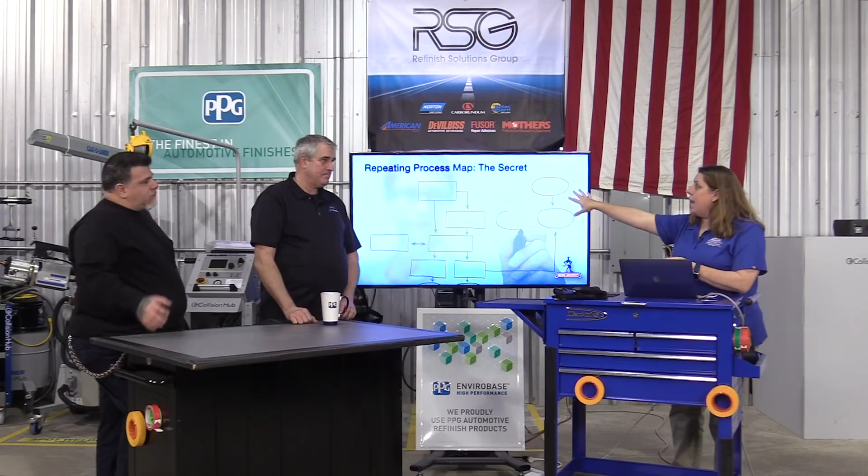Yeah, you're going to learn how to go find the supporting documentation, because you're driving the train at that point. Yep, and that's what the secret is. Over and over, I can't tell you, it's the secret to estimating, it's the secret to repair, it's the secret to being a great painter.

It's building this repeatable process map. It's the secret to running a business. You always have to have some sort of process planned out, figure it out, and stick to it.

Right? So let's talk about refinish, because I always stump people when I talk about... We're going to write the estimate? Not yet, not yet, we're not there yet. But we're painting, the car's almost done. We're ready to buff, what are we doing? We're 2 hours into an overview show and we still haven't written the estimate yet.

So we're painting, right. I hear this all the time when I talk to people about, well, what is your paint department doing for OE procedures?

And the painter kind of looks at me and goes, 'That's not my problem.' Well, it is your problem in a lot of ways these days.

There's roughly 400 plus documents floating around out there that are OE procedures related to refinish. So what I like to do in the blueprinting process, while the car is in there, when we decode the VIN we get the color code anyway. We'll bring the painter up and start talking about it - this is my 2017 color codes for the Camry.

Nothing really in the Camry that causes me a whole lot of strife or worry. Now, there are some... I'm kind of worried because I saw champagne and creme brulee, so now I'm hungry and thirsty.

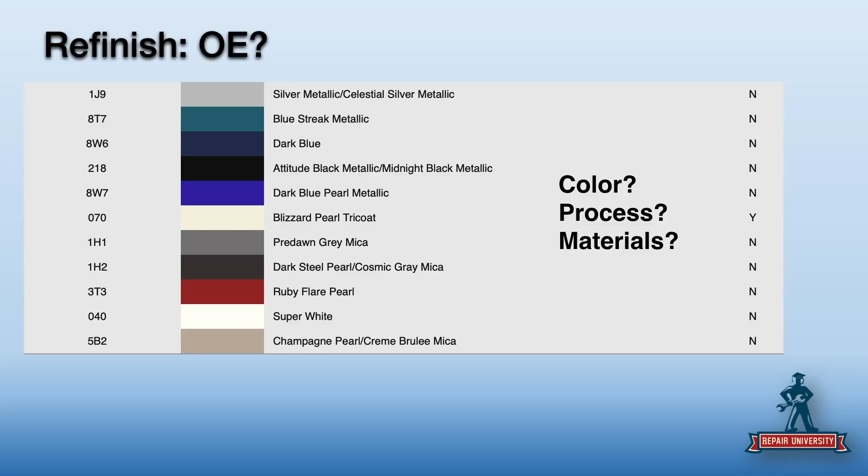How many different spray out cards might you have to make for this particular color to adjust it properly? You may have a color that requires some additional preparatory procedures - so I'm going to go beyond the 400 grit to prep the blend, 1,000 on the panel, or go to 1,500 or 3,000.

This Predawn Grey Mica isn't as bad as, say, 47G from Mazda or whatever. But we've got some things that we need to think about in the refinishing process.

You don't think the attitude black might give you a little trouble? It's got an attitude - it's your color. We named that one after you. Yeah, it does have an attitude.

But the things I want to be talking about with my painter in this process, while looking through the OE repair manual, is: is there a color procedure process I need to be aware of? Is there a mil limitation I need to be aware of? What's my final sanding before I put the paint on there?

Sometimes they want a requirement of a much finer grit to avoid sand scratches or mottling of the paint. Sometimes you'll get a color that's a factory pack, not something I'm going to mix on the bench, and that may change my ordering. Some things to think about.

And then there's different materials around that refinishing process. Toyota is one of those companies that has anti-chip primer, and this is not new - it's been around forever. I can't remember when it started, but I can't remember not seeing it.

It's like one of those things - I know it's been in there for years - the film thickness is going to be thicker at the beginning portion of the hoods because it's chip guarded. Same thing with the rockers and the bottom of the doors, and you don't visually see it. But if you take a film thickness gauge, you will see.

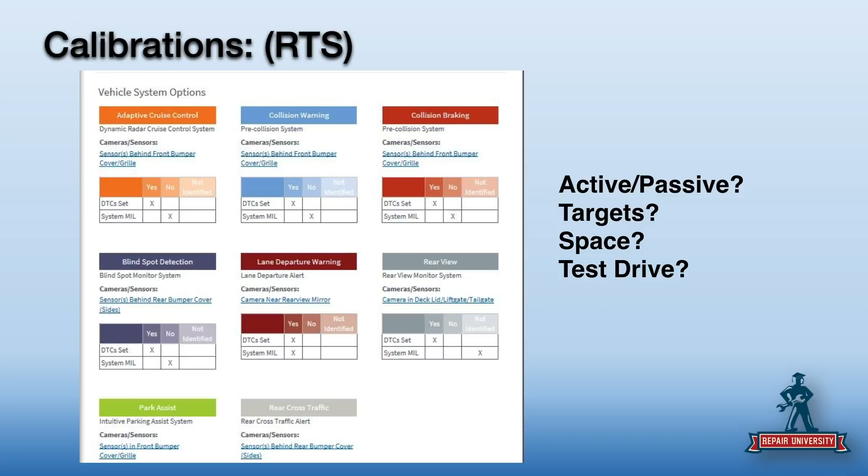Do I have the space? So one of the things we're about to see is I need 26 feet of clear level space behind the car. I'm looking around my shop going, do I have 26 feet of clear level space that I would even be able to do this physically here, right?

What would it take? Where do I have to do it? Do I have to let every car deliver on Friday before I can do this procedure or whatever? I've got to know these things.

And then test drive - so many things have a test drive these days. I think we saw 3 of them. We're missing the boat on that one. Especially we're missing releases - you don't just go driving a customer's car around town, you've got to get the release. So make sure you've got that.

So let's go through this - you pulled this one for me. This is my lane departure warning camera. I need - what do we got here? I've got to have a lot of distance between a wall and width on either side for this thing to line up, right?

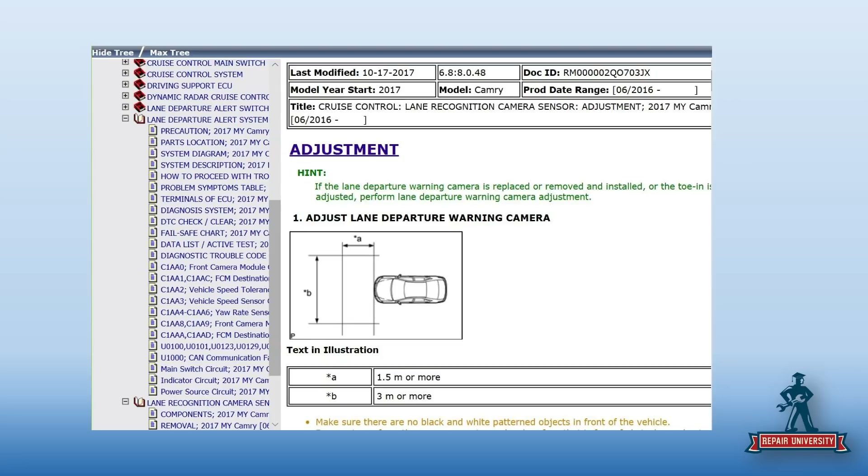All right, so we're going to jump into TIS real quick, and we're going to look at that lane departure thing. Is this where you want me, Mark? You want me here at perform the camera adjustment? So the camera adjustment, yep.

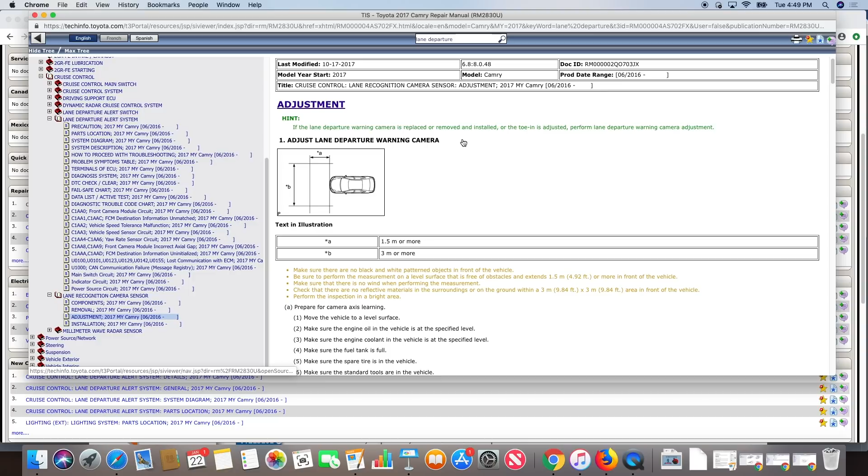Boom, and there's a lot here. There is a lot there. Wow - move the vehicle to a level surface. Make sure we have all that fuel and everything is full again. But this time, nobody in the vehicle, so our skinny guy is off the hook.

Yeah, we don't need a skinny guy. I like number 10, this guy can do this job. It says clean the windshield. All right, I have some.

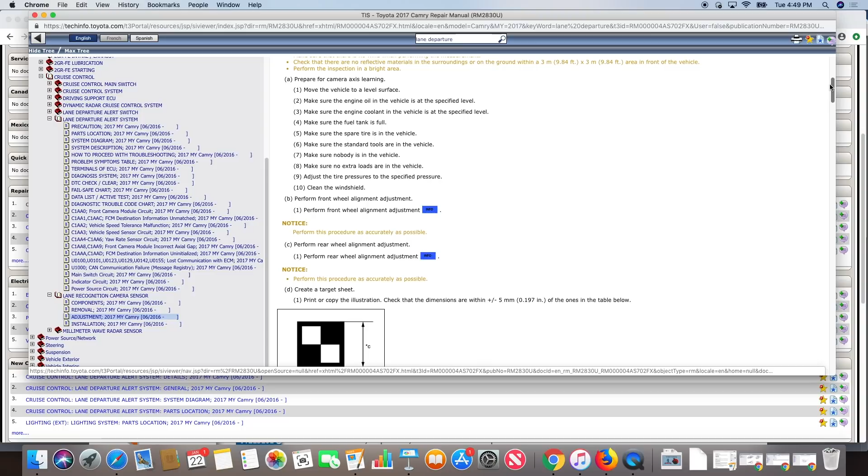And then perform the front wheel alignment adjustment. So we have to do the alignment first, before we do this? Oh, so now I've got to make sure that it gets to the alignment shop and then back to me. Yep.

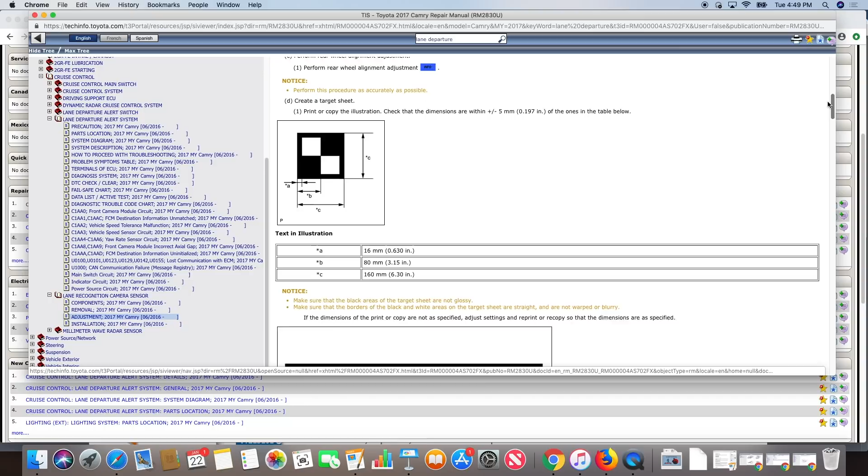All right, and there's your target - create a target. They want you to print the target, and then after you print it off, they want you to measure the target that printed off to make sure it falls within these specs.

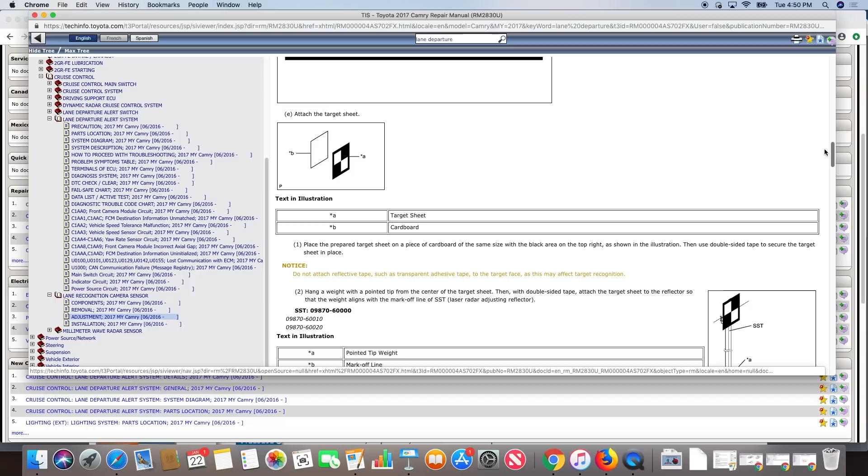Okay. And there's the target. So that guy I saw on YouTube that somebody posted in Collision Repair Technicians United maybe a month ago had a folding ladder and he was self-printing a target, and he's like, I can do this at home. No. Well, he probably printed this and then put it on a ladder is what he did. So I gotta print my target, make sure it's the right size. Yep. And then I gotta build something to put my target on. Put the stand and meet the spec of that. Right, okay. Which is not the ladder you bought at Home Depot.

Not the ladder. Oh, looky there. Okay. And then keep coming down. Okay. There's my plumb bob. Yep. Anytime you start a collision repair procedure with get your plumb bob,

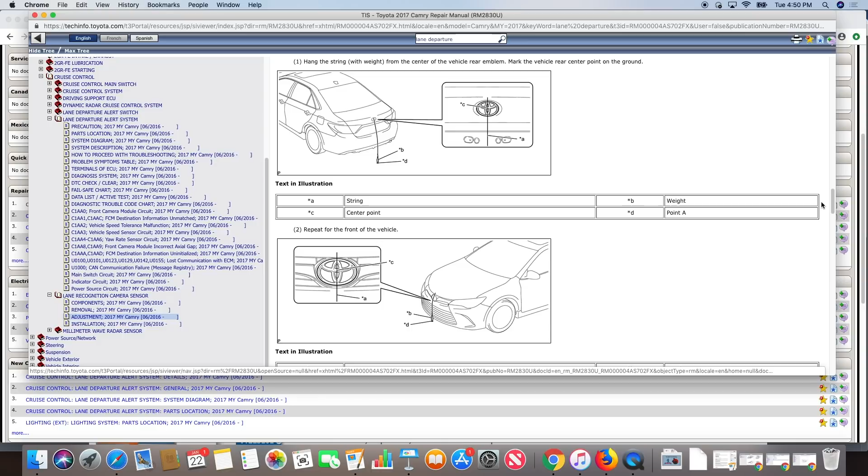when we're still struggling to weld properly, I'm thinking, I'm not so sure I'm trusting Bob, my technician, to get his plumb bob. Now, do you buy that at Home Depot, or does Snap-on have a special? Is there a special plumb bob for plumb the bob? Harbor Freight, it's cheaper. No, you don't go to Harbor Freight for anything. We're calling the brick mason to come do our alignments now.

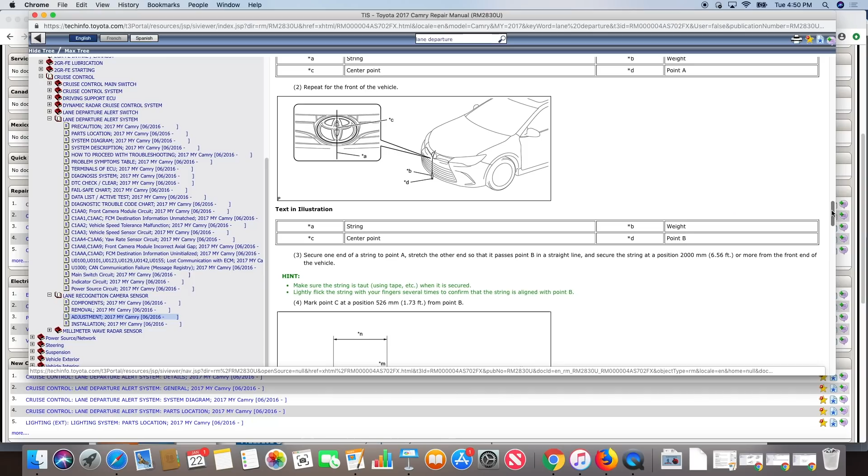So now I've got my plumb bob. Now this becomes where our space requirements in the shop, front and in the side. Wow. And the windshield's clean. And one of the things that we also have to look at, which we looked at in another procedure, was, is the bracket that holds the camera not bent? Because if it is bent, what do we have to do, Kristen? We got to replace the windshield. Yeah. Not because the windshield's broken, because the camera bracket's bent. Yeah. That's attached to the windshield. Yeah. So I've disconnected the battery, I've done some things, and I'm now going to have to relearn all of these systems because I've done that.

I've got a target here that I've got to have. I now need to decide, do I have this equipment and am I ready? So I may have the targets. I may do a lot of Toyotas or whatever, and I may have them. Or I may have one of the new kind of generic targeting systems, whether it's Autel or Bosch or whatever, where I'm not printing off pieces of paper and getting PVC pipe and trying to build all this on my own. Does your technician have the training for it? Yeah, and can my technician do it?

How far are you from the dealer? If you're really close, you're probably better off sending it to the dealer. If you're really far away, you might have to invest in a separate mechanic, separate bunch of equipment to be able to do this stuff. I think what a lot of people miss is this isn't a pass-fail. This isn't a yes-no, green light, red light kind of thing. Whatever you tell that camera to see, it sees. So kind of like what NASTF came out with on the Honda, that 1 degree made a huge difference. So you may think you're doing it, and you've got the camera looking here when it needs to be looking here, just a couple degrees.

And if you've got one of the pass-through systems, whether it's asTech or AirPro or whatever, fantastic, amazing, wonderful people on the other end of the line, but they don't know whether my tech's exactly doing what he's supposed to be doing. Well, and then we also got to take this as a package, because we're looking at this individual calibration, but we also have an occupant weight sensor. Now, do we have the weights for that? Do we have all these different things? And so we might be able to do 5 or 6 of these, but not that one. Right. Well, if we're going to the dealer, let's just get it done there. Yeah, and that's that decision.

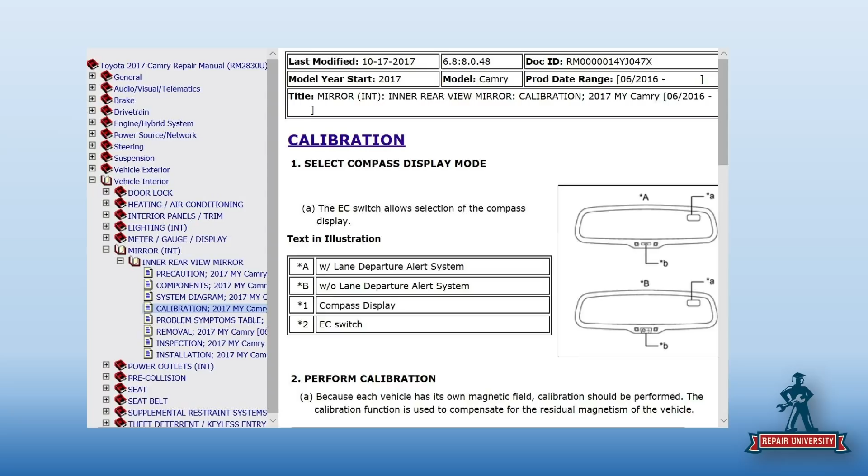So when we talk about logistics, and I'm putting my logistics manager hat on, I have to decide now as I'm blueprinting the car, not Friday when I'm thinking about delivery or whatever. Right. So here we got what we do for the lane departure. This is for the compass. Yep. So the compass is on the mirror, and if I have to recalibrate the compass, I'm driving in circles.

Yep. Well, you're driving in circles, and you're pulling forward, backing up in a set pattern. We'll just go to it and test. All right, so let's get into it and test. It's quick, pretty entertaining. So on your test drive, you may have some additional maneuvers. Okay.

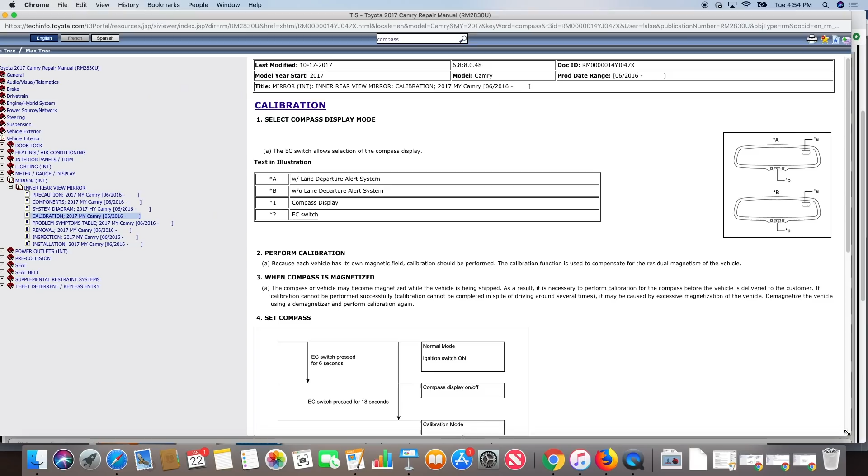So now we're at the compass, and with the compass, after we reconnected the battery and followed all the instructions, now we've got to follow a proper test drive. Drive around in a circle 1, 2, 3 times, and the direction will display. So I've got to drive in a circle 1 to 3 times. So you get north, northeast, east, southeast. But if you look at the bottom, though, we have to pull forward and back up and forward and back up.

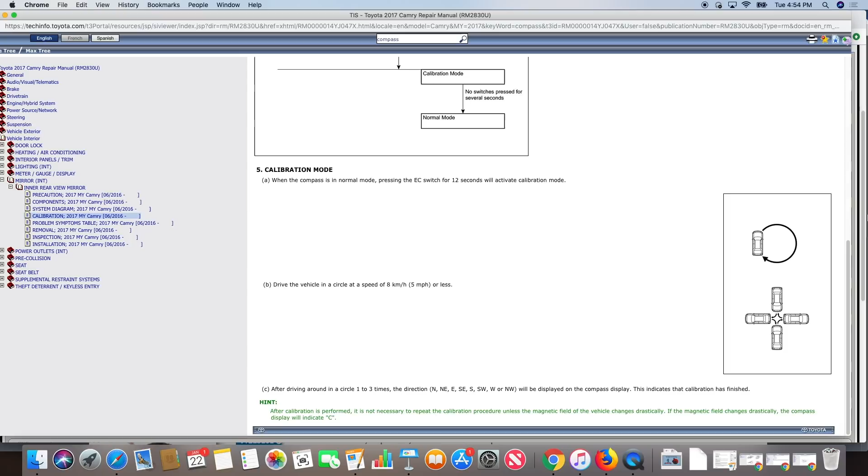Right. So it's almost like Dance of the Swans or whatever, with the cars going in and out. Yeah, it kind of is. Do you play music to this? You could. I would suggest classical. At 5 miles per hour. That's so fun that way. If you do it like 60 miles an hour, you kind of drift a little bit. Fast and Furious? Would that work faster? Could I improve my cycle time by doing more of those in a certain way?

So, a small snapshot of what calibration takes and things that I think a lot of people don't think about. The one thing that keeps me up at night, I've kind of given up on some of the other things. My 2 kids do keep me up at night. The dogs are amazing, they never make mistakes. But there's so much when it comes to the electronics and the calibration and the relearn of that. That's really overwhelming.

It takes a lot of time deciding whether you have the in-house capabilities or not. And then keeping in mind that in-house capabilities isn't just because of the tool you've purchased, there are a whole lot of other parameters around that. Training, the space you have to have, and all that other stuff. Yep. I mean 26 feet, right? On that blind spot monitor, I need 26 feet in the rear. And I gotta have the little metal cone thing. So there's a lot there.

So it's a short 2.5 hours. But we didn't run an estimate. You guys lied to me. We're going to do that next. We're gonna write the estimate off camera, right? So that's just the overview process on the 2017 Camry on what would be a moderate front-end collision.

But as you can see, it's all really about building that process map in your head, deciding what the process for taking that part off and putting that part back on is going to be, what other parts are going to be affected in the repair, and then making the list of the information you need, and then going to TIS to find it. And when you become that process map builder, finding the OEM repair information you need becomes easier and not so overwhelming because you're not asking it to serve it to you. You're telling it what you need to know.